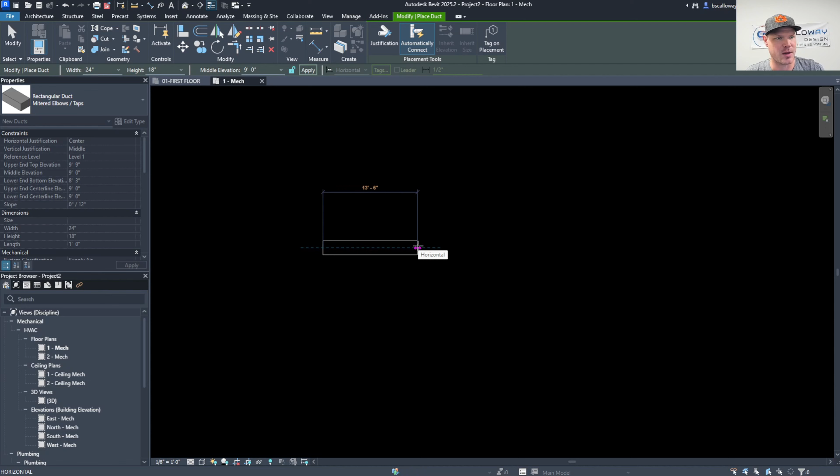Let's take a look at this mitered elbow slash taps, and I'll show you what the problem is. We've got 24 by 18. Middle elevation up here is 9 feet. And we're just going to draw here a couple of fittings, and we're going to go at 90, and we're going to do two 45s.

Obviously, a 90-degree fitting and a 45-degree fitting are two different things. So it's putting the same thing in, and if you click on that 90, it's showing a mitered elbow, which is actually for these 45s. And if you drop down, I've already loaded this in, but I'll show you how I loaded that in. But anyway, out of the box, there is no 90-degree elbow. It's everything you see here minus that rectangular elbow.

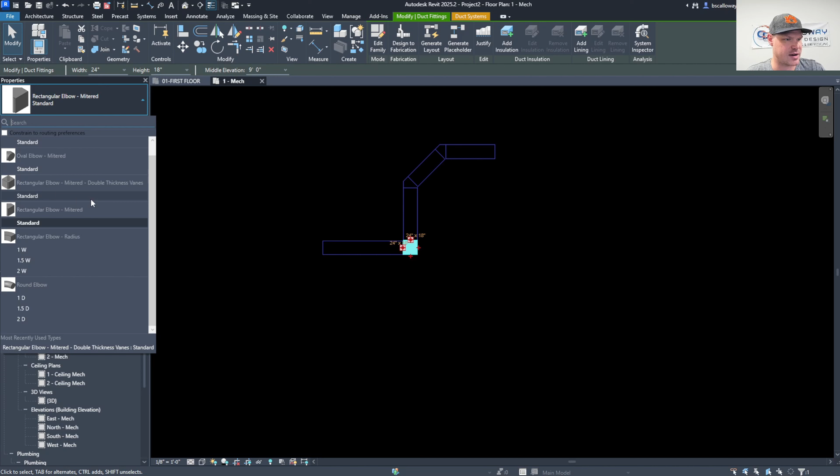So what you have to do is load that in and go to Insert, Load Family, and let's just go to all results real quick and show you. If you come down to duct and duct fittings, and we're on rectangular, so let's look at elbows. And I loaded in, there's two different ones here. You want to make sure you load in the double vane thickness, or double vane elbow. Single vane, I'm not sure if I've ever seen that. Very rarely if I have, so I always use the double vane.

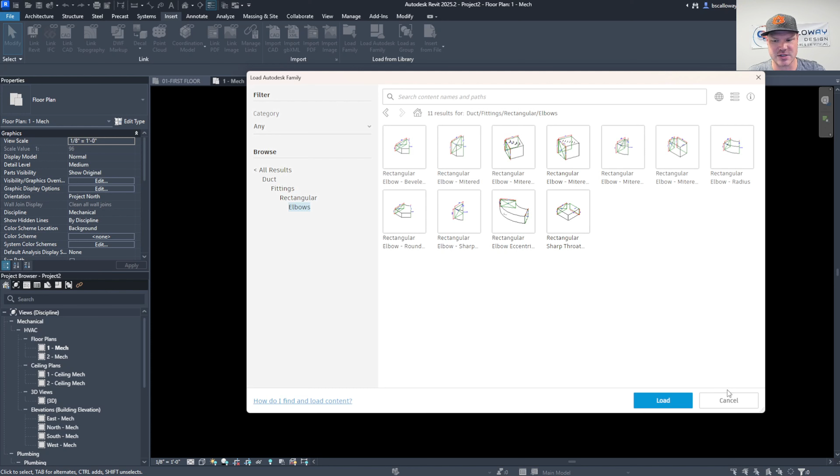So anyway, load that in. As you can see, I already loaded mine in, so just hit load. It's going to bring it right on in, and what you're going to do is select on that duct, edit type, and then routing preferences right here under fittings. We're going to click edit, and what I put 2 in here for was to show you that it won't change it for you.

Revit, just like if you watch the plumbing video, Revit for some reason does not let you kind of go between the two. You have to select it and change it. I'll show you here in a minute, but I wish it would let you switch between different fittings for multiple different reasons. Same in plumbing. But anyway, the mitered elbow is what was showing up because it was the top one. Let's get rid of that. And this is that mitered double thickness that we loaded in.

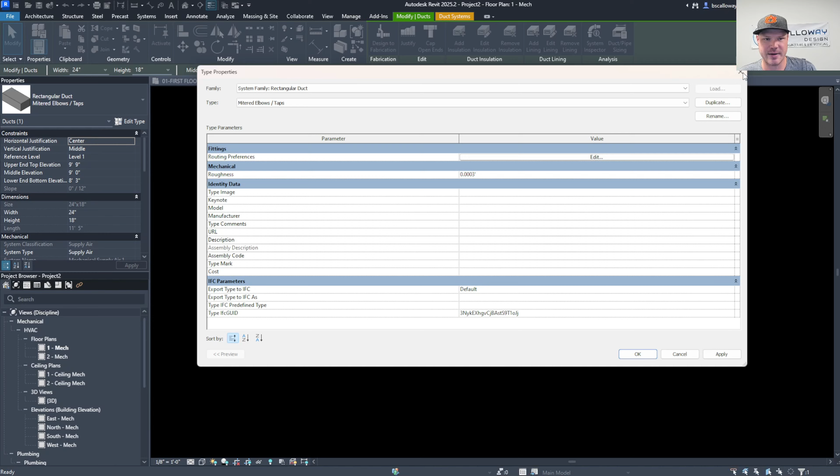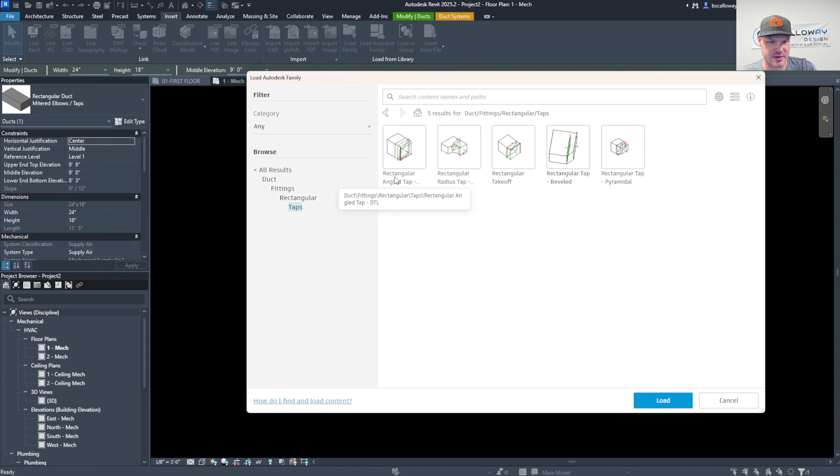Tap, rectangular takeoff. Again here, I would load in a shoe tap. So let's go back here and let's see fittings. Tap, shoe tap, rectangular tap, radius tap, rectangular takeoff, rectangular takeoff beveled. Okay. I think the one that I have loaded in is called a shoe tap. We'll go with beveled. So let's load that in. This is great because I can show you how to load that in.

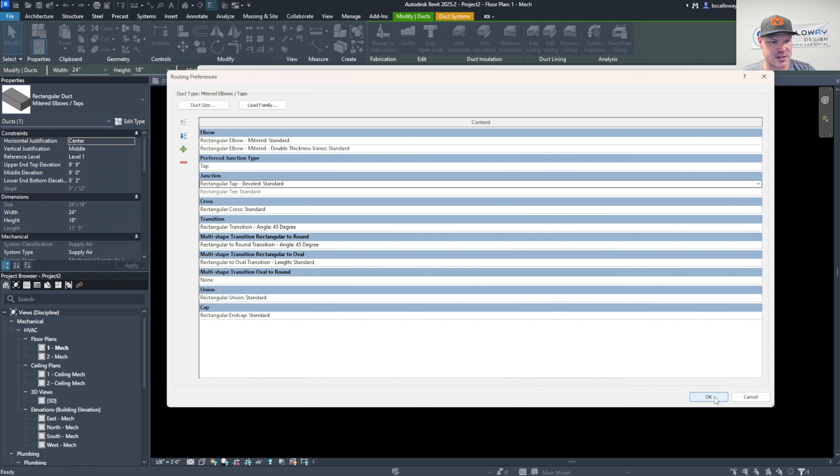Now let's click on that, back to edit type, back to routing preferences, and let's change our takeoff to that beveled. Like I said, I have a shoe tap. We'll see what this one looks like. But you'll want to find yourself a shoe tap to take off of that has an optional damper, and we'll get to dampers here in a little bit on the round duct. So let's say OK. Apply, OK.

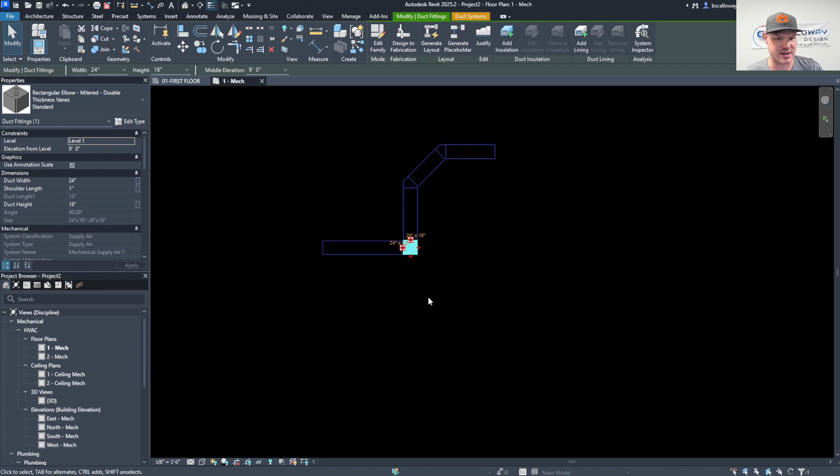Now the first thing I want to show you is about these elbows here. Like I said, this elbow is really a mitered elbow, and we loaded in our rectangular mitered elbow. So let's click that. But the problem is, even when you do that, and Revit should know this, the throat on the elbow, virtually impossible to get to 1 inch. Those guys can cut it in the field that small. A shop cannot do it that small.

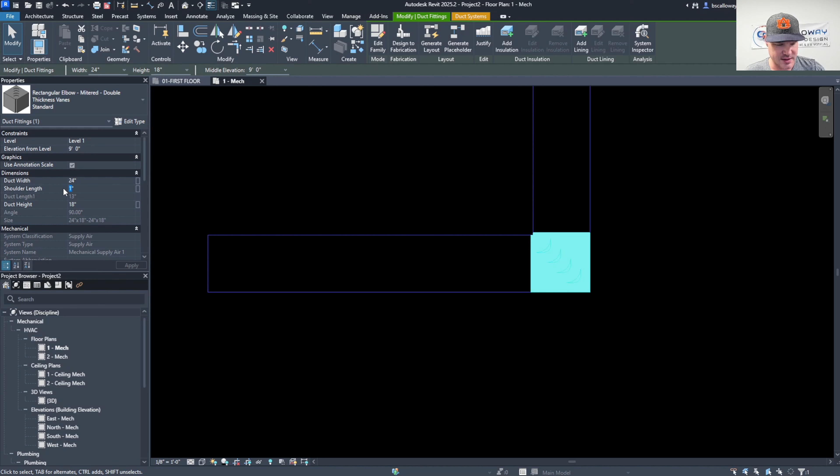It really should be 6 inch. You can come in here and just go shoulder length 6 inch, and then you have to do that for every single time you put that fitting in. What I would do is click on it, go to edit family.

Up here in the upper left, you got properties. Click on family types. Let me bring this over here, and then I would change that shoulder length to 6 inch. Now sometimes you want a 6 inch and a 4 inch or something. You can add another parameter here if you want to have two different shoulder lengths. I'm not going to get into that right now, but let's just change that to 6 inch.

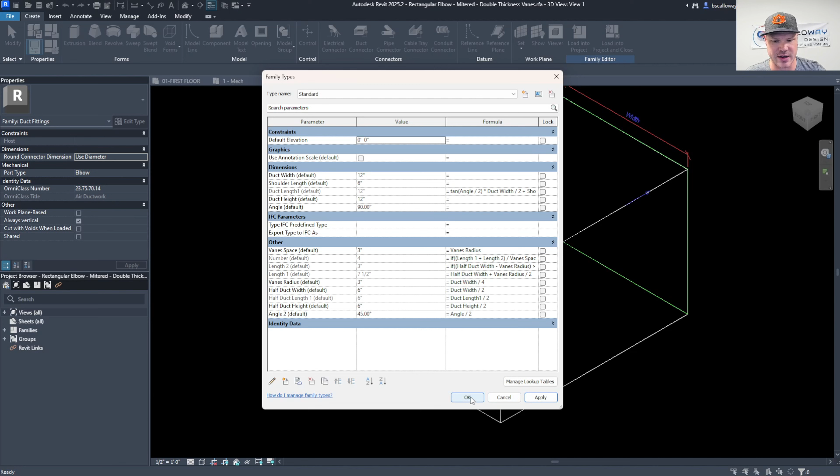That way when we're drawing in real time, we've got an accurate dimension for what that elbow is going to be. So let's load into the project. I would recommend saving your fitting somewhere. I'm not going to save it because I already have mine loaded in. So load into project 2, okay, and I do not want to save it, and we'll overwrite.

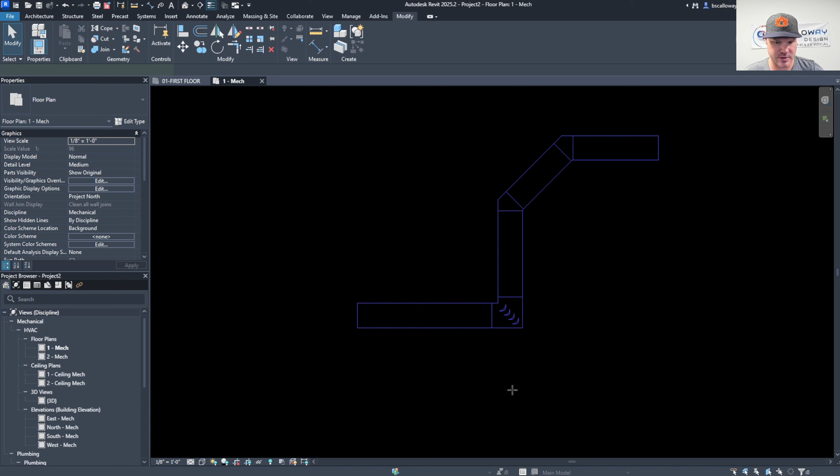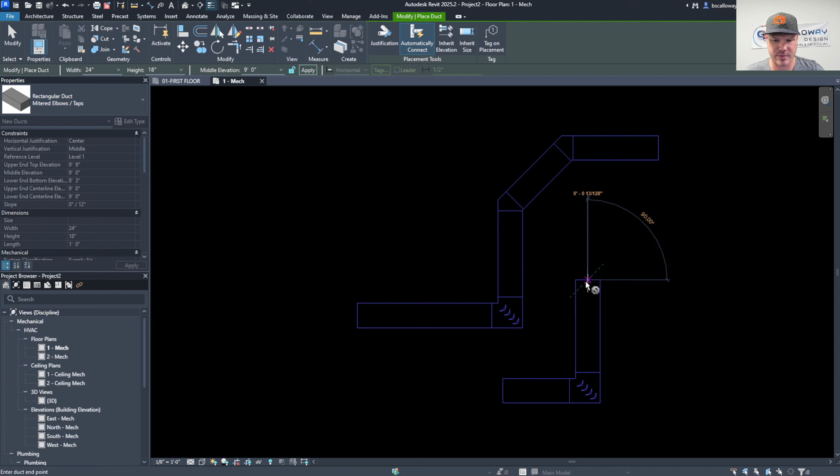Now when I draw, oops, I didn't put the miter elbows, taps, edit, routing. Forgot to tell you. I could have sworn I did that. No, I didn't hit apply there. All right, so now it puts it in there with that 6-inch throat.

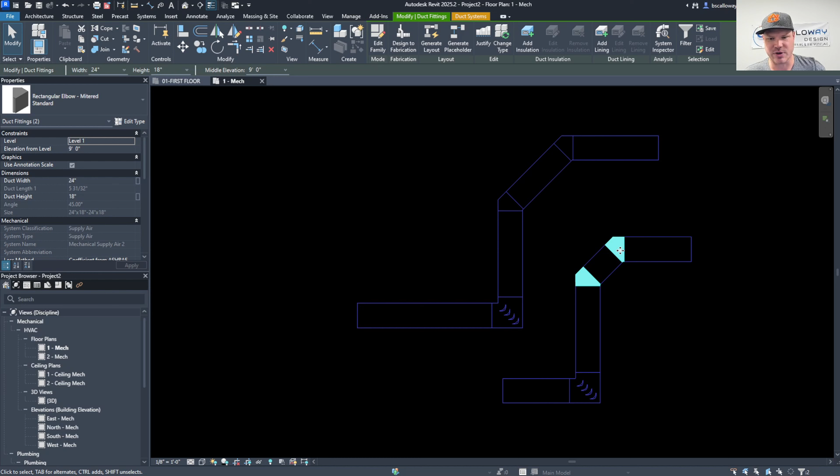Now, the problem with Revit is that you can't do anything to get the same system to have different fittings there. We obviously don't want turning vanes in that. They're not going to be 90-degree mitered elbows. They're going to be those rectangular elbow miter that we were looking at before. And again, those throats are not realistic.

You have to do it by type on these. Yeah, you got to do it by type. I mean, that shoulder's got to be, I would assume, probably 4 inches. Maybe 2 inches is good, but we're going to make it 4. So there's two different ways you can do that. You can select one and change it like we just did there.

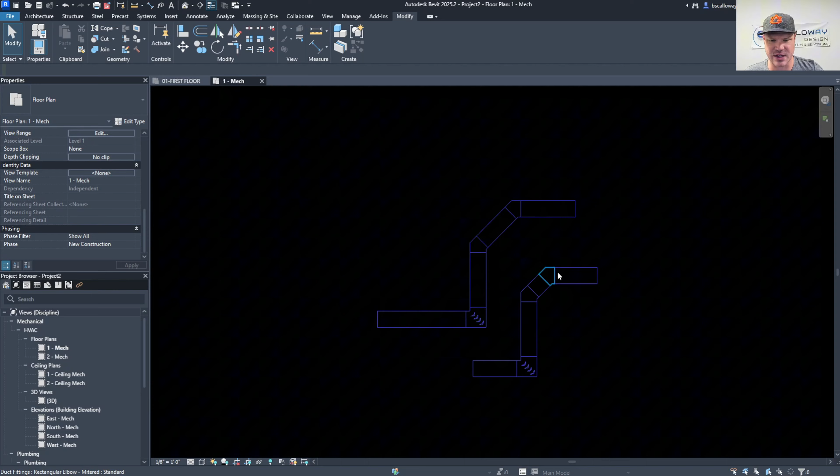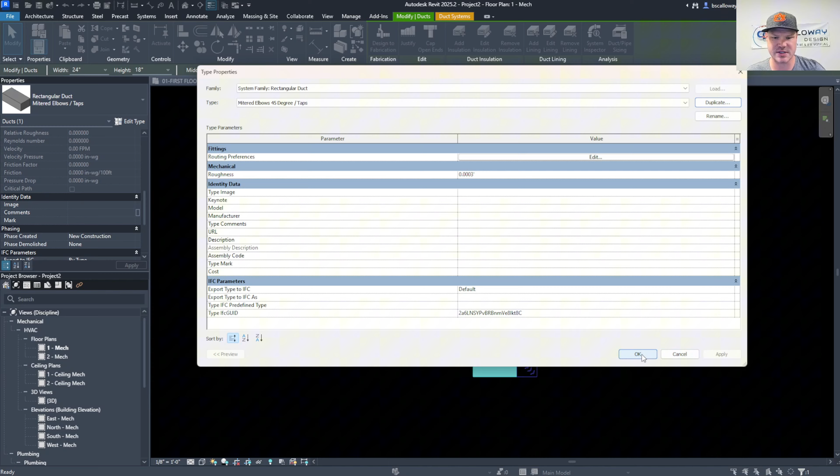The other option is to set up a completely different one: go in here, say edit type, duplicate, say 45 degree, and then it's also going to have taps on it, let's just say. So now we've got a separate system completely set up, and if we want to draw duct work, we got to change it to, so now we want to make sure we're on that mitered 45 degree that we just set up. And then if we go draw duct work, boom, boom.

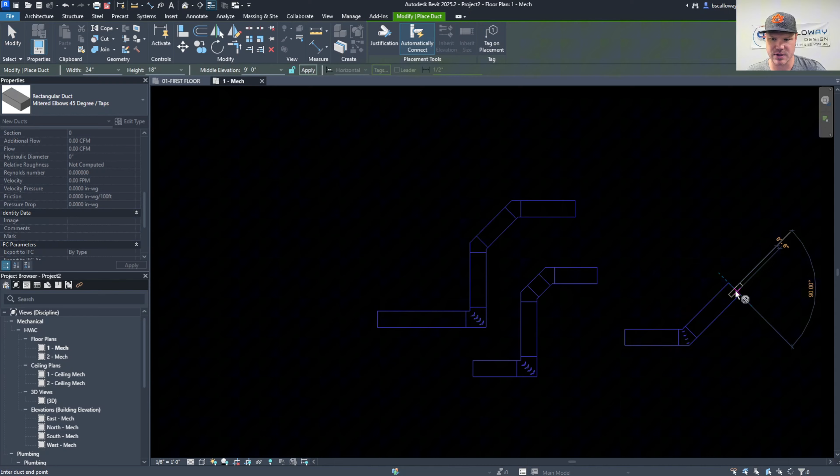Did we forget to put the right one in? Yep, we forgot to change that. So let's change that back to mitered. Sorry about that. Boom, boom. And then, actually what we could have done was this. And now once we connect it, now we've got the right fittings in there.

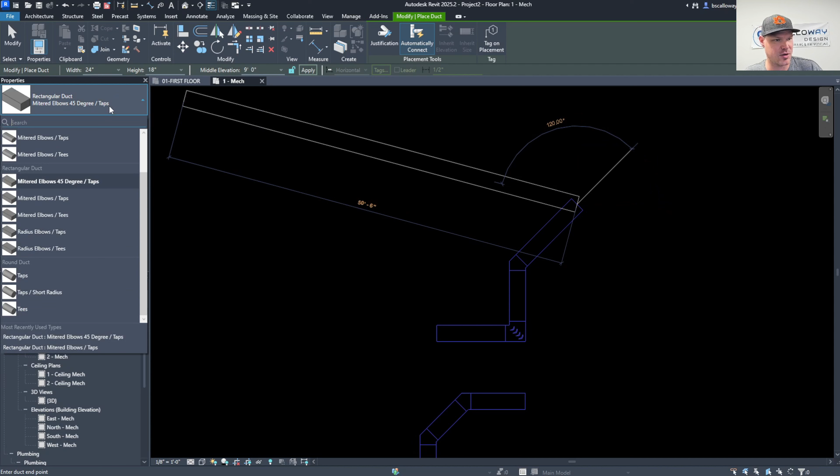So what you could do is, let's just say you're drawing a system and you want to start out with 90s. You got your mitered elbow taps selected, and then that's already going to put an elbow in there for us. And now we switched it to 45 degree taps if we want to do a 45 next. Now here, let's say we're going to go back to 90. We're going to go ahead and change that back to mitered elbows. Come across. It's going to put the right one in there because of this duct. And then now we're going to have the correct elbow going up.

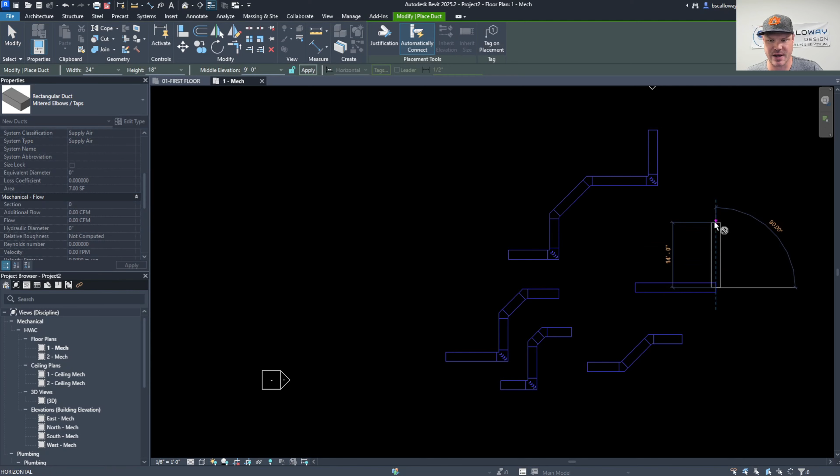Two different ways of doing it if you feel like switching back and forth, or if you just want to draw all of them in. You got that. And then that wasn't quite a 45, but anyway, you can come in here and select them and just really quickly change it like that. Whatever's easiest for you.

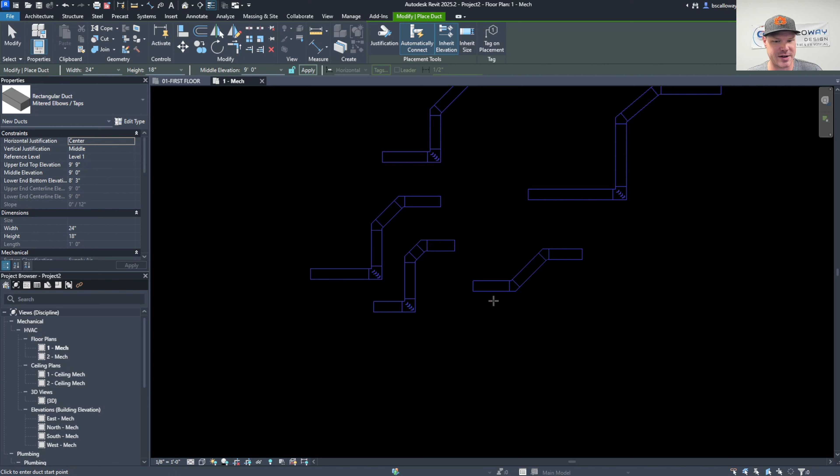But anyway, so let's now look at the taps that we set up. And you always want to make sure you hit inherit elevation. I'm guilty of forgetting to do that quite a bit. Somebody even commented, can't believe that's not a default, or something over here you could select. This should be a default. We're going to be inheriting elevation 99.99% of the time.

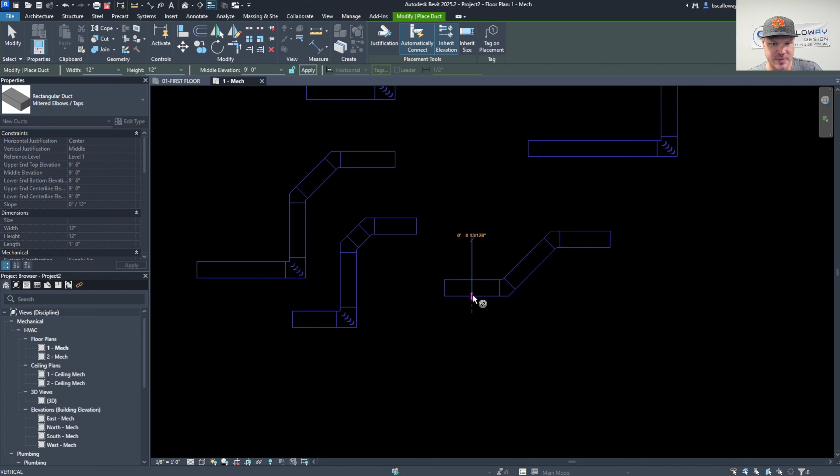Anyway, rant over, inherit elevation, and we got our taps, and we got our inherit elevation. Let's say we got 12 by 12 coming off of it. We'll change that right up here in the top. And now look at this. We got to select inherit elevation again. Revit, fix that. All right, so now boom, and now look, we put a shoe tap in there, and it's got the shoe tap.

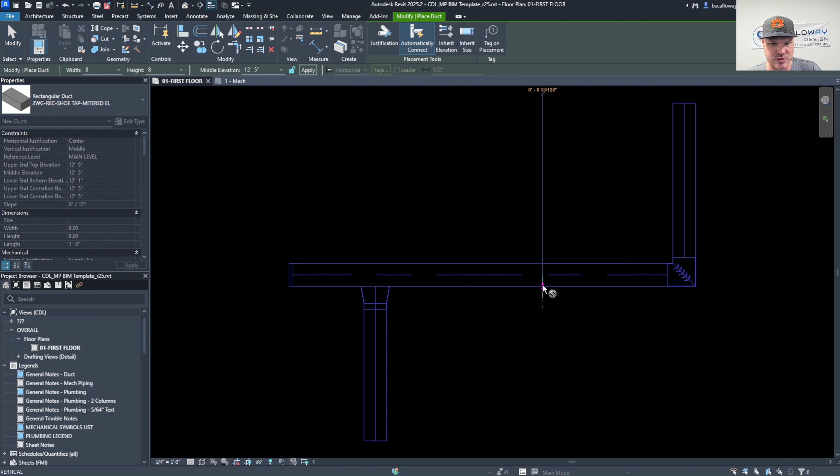This one probably doesn't have it. It doesn't. I'm gonna show you when we get to the round duct about taps with dampers. If you go on mine, this is my setup. If I go to, see, I almost forgot to hit inherit in here. If I go here, mine's gonna have the option to turn that volume damper on and off.

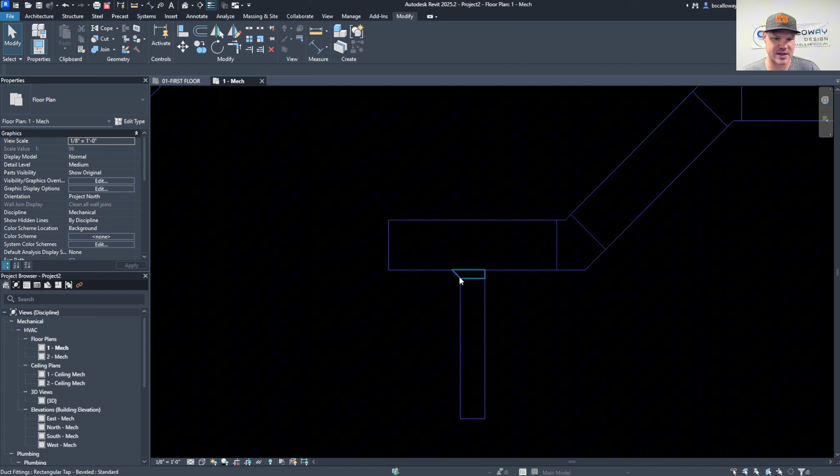So you're going to want that option. These out of the box ones, for whatever reason, don't have it. I'm not going to dive deep into that for this particular video. So now you can see that we've got that tap set up with our shoe tap that we looked at a minute ago. Now let's look at our round duct.

Let's come down here to taps. And what I'm going to do is edit type. And I want one that's going to have conical taps. So I'm just going to name it conical taps. Okay, and if you look, I may have already loaded in taps. There is no conical tap preloaded in, which is the most standard tap off of a rectangular duct that I see.

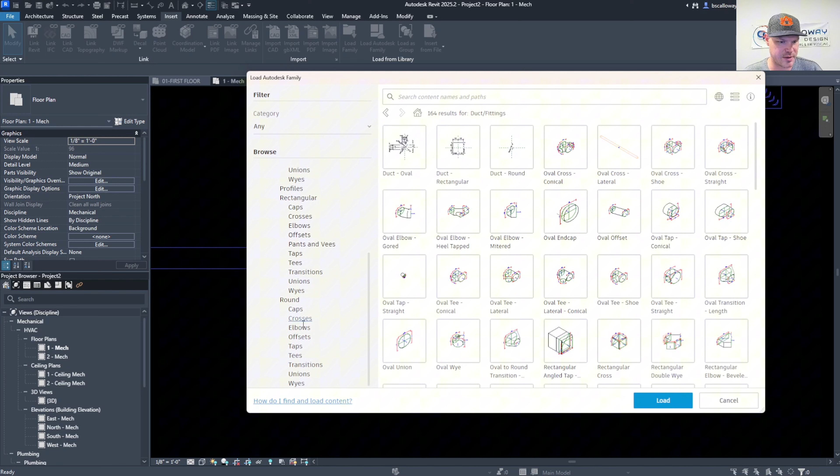So what you have to do is you have to go into Insert, Load Family, go back to Fittings because we need round, come down to round, and look at your taps. And here is going to be another thing I'm going to show you that bothers me. I cannot believe out of the box it doesn't have a button for damper on and off. Anyway, we're going to load one in with a damper, and I'll very quickly show you how you can fix that to add a button to turn it on and off.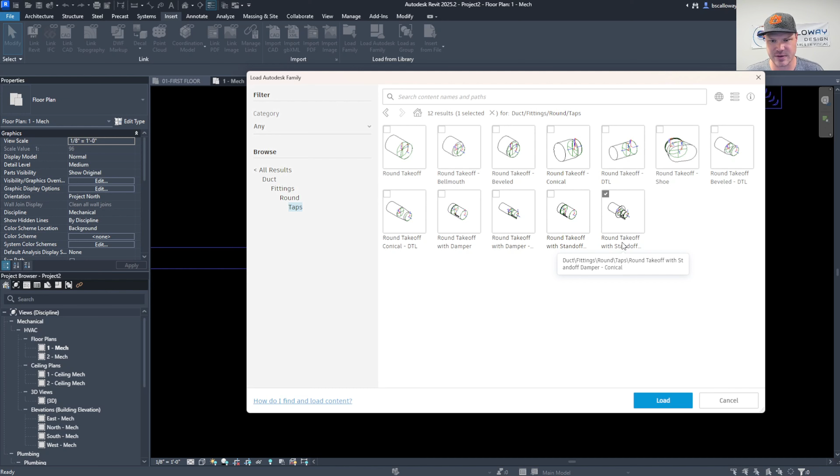So let's load this one in. This is a round takeoff conical with a damper. We can load it right into our project like that, which makes it really nice. And now let's go back here, we must not have saved it, but anyway, so conical taps, okay, edit. And now for our junction right here, we got tap already. We want to set that to that conical and say okay, apply, okay. And now we're on our conical tap.

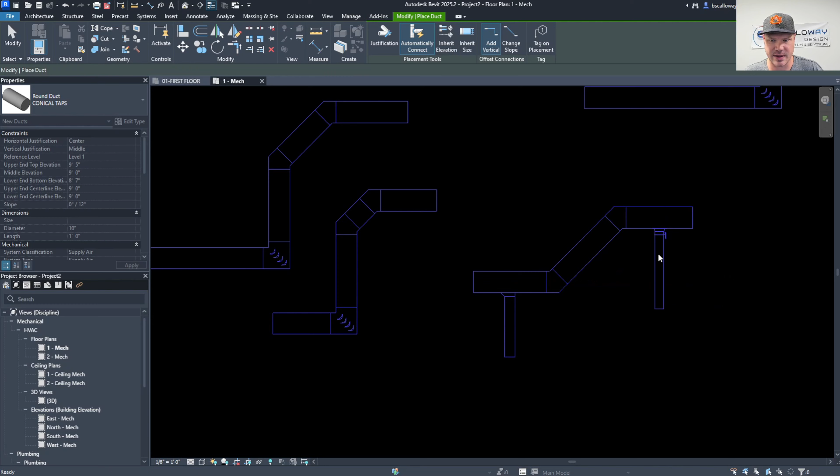Let's make this, I don't know, 10 inch. And let's bring it, again, inherit elevation. And now we got our conical tap in there with our volume damper. One nice thing about it is you can adjust the takeoff length. I think I usually set mine to 10 inches. Give myself a little bit of room, make sure we've got plenty of room for that damper.

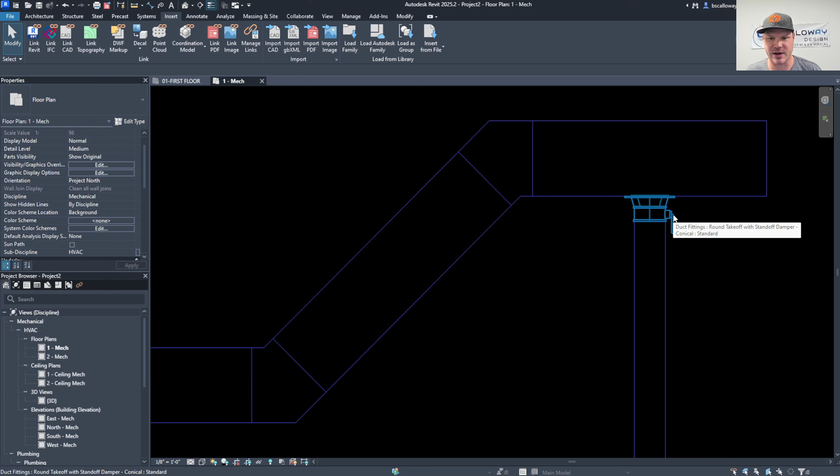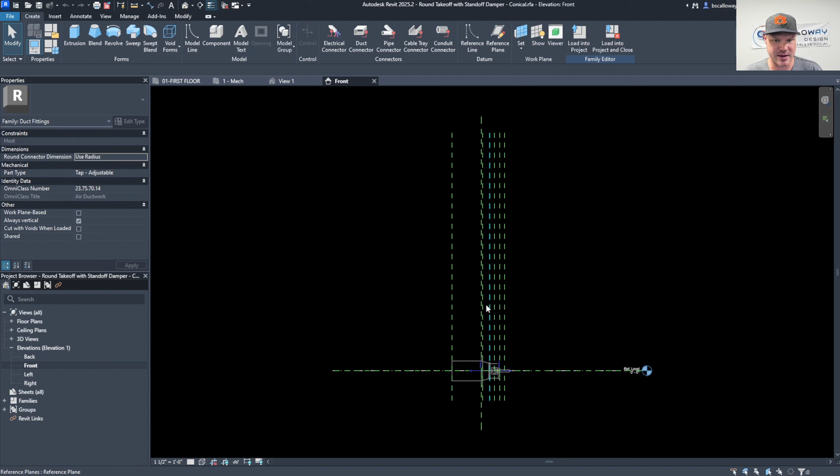I'll show you very, very quickly, and then I can do a deeper dive into how to completely fix it. But if you want to add a button to get rid of that damper, you can click on the fitting, come up here to Edit Family, go to an elevation view. I would just go to the front view, and you can see you've got all these reference lines. But we're going to click on everything that's part of that damper that we want to get rid of.

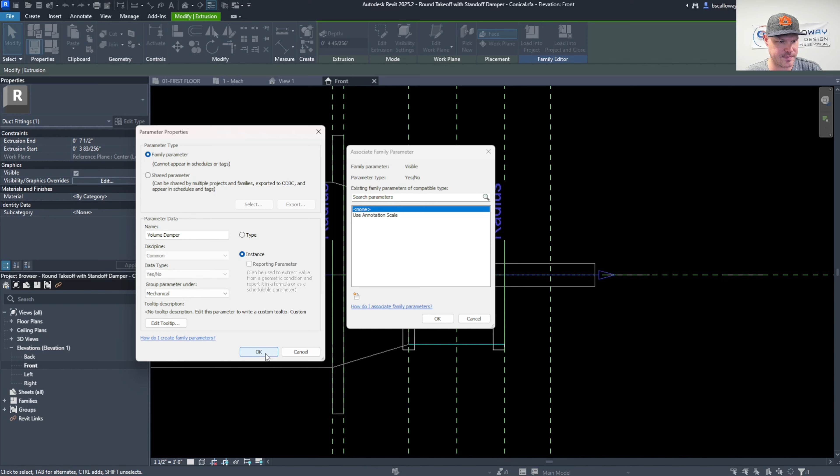We're going to select it, and then right over here under graphics, visible, we're going to click this little box beside, and we're going to add a parameter. And we're going to make it an instance, and we are going to call it volume damper. We're going to put this under mechanical. Okay, now that's that piece. We want this piece, we really want all of this. And then we're going to do the same thing. We're going to select there, and we're going to make everything volume damper.

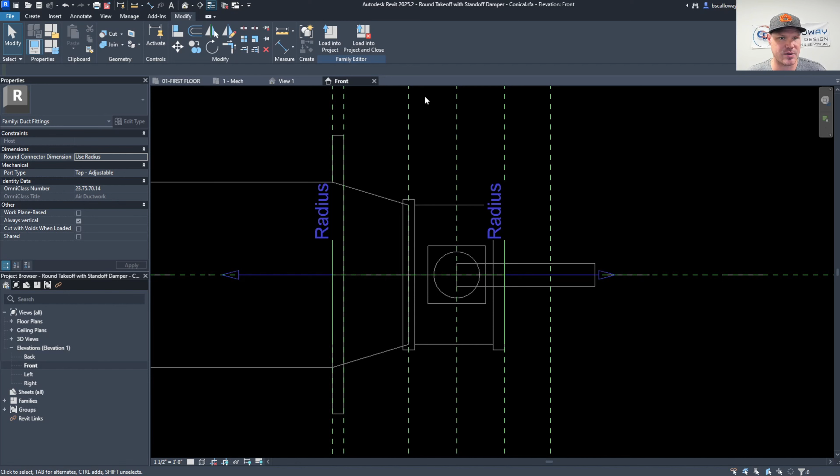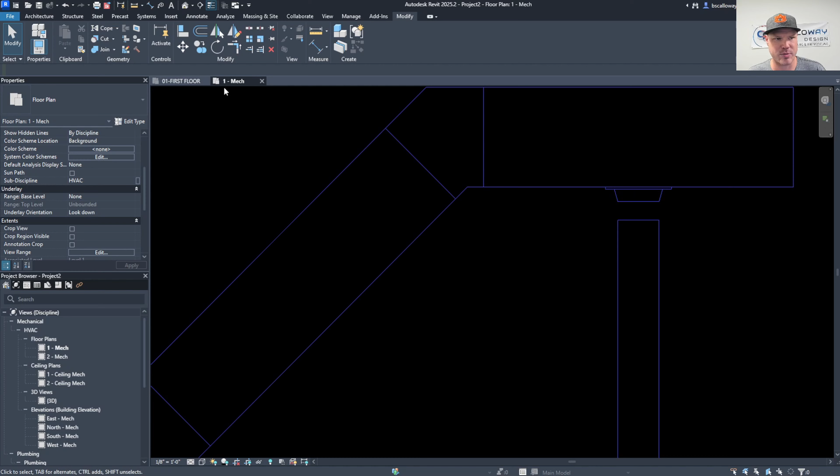And perfect. So now we're going to load it in. Again, I'm not going to save it, but we're going to load it into our project. Override existing. Now you can select on it, and you can see you've got a button right here under mechanical for volume damper. You can turn that off. Now, this didn't move. The ductwork didn't move when that damper got removed. If you look at my damper right here and I click on volume damper, everything moves with it.

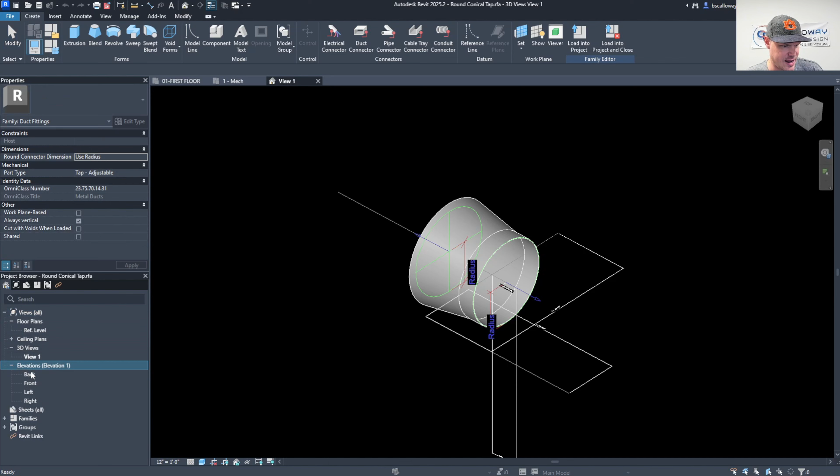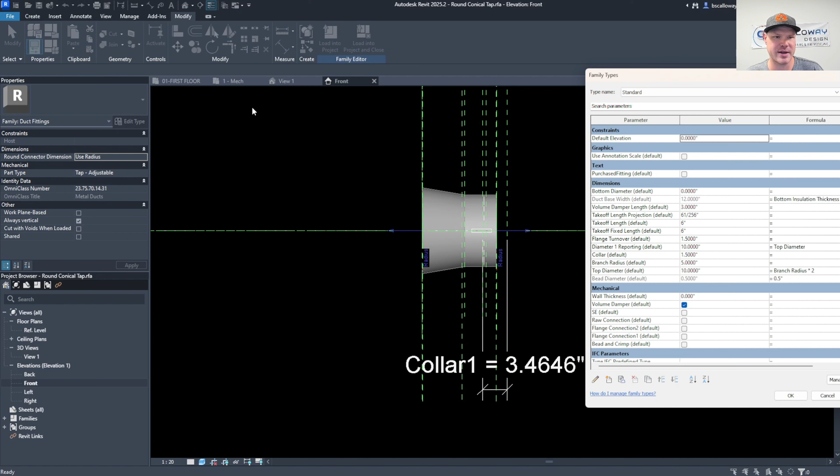So the thing is that you have to have it, and again, I can do a deeper dive showing you how to fix this, but all of these reference planes and dimensions are locked so that everything moves together. So if I come in here and click on that and apply, everything's moving because it's locked together. That's why it's moving in my template, and it's not moving here because I didn't spend time to set up all the reference planes and everything.

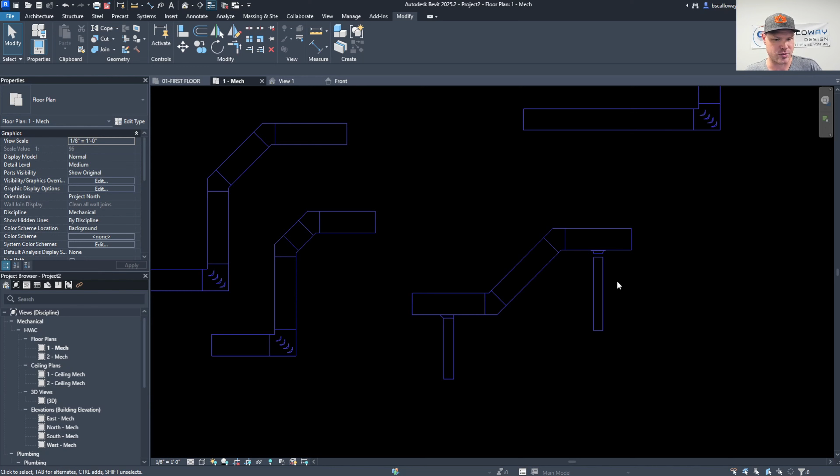But anyway, that's how you get a duct system set up. Load in, add any fittings that you think you may need. Check with your local mechanical shop manager or field guys, and make sure you get these dimensions on these throats and a lot of these dimensions correct, even on the engineering side, because it helps a ton to make sure that everything is going to work out the way that you want it to. Anyway, that's what I'm going to show you in this particular video.